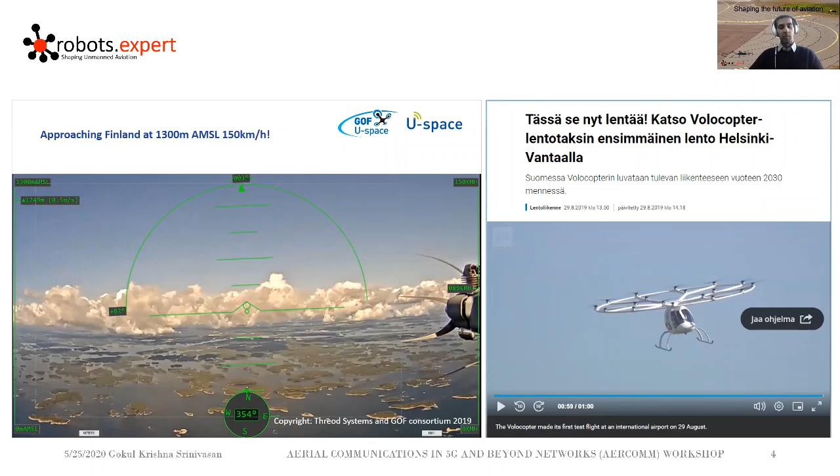And the second result of the Gulf of Finland project was the first ever air taxi flight inside an airport. So the Volocopter air taxi took the first ever flight in Helsinki-Vantaa airport. And Robots.Expert was privileged to be a part of this project, and we facilitated these trials and helped the companies with flight permissions and licenses and certifications.

Outside of these 2 European projects, Robots.Expert is also actively involved with NASA in the Advanced Air Mobility project, and we are part of the technical working groups, advising them on issues related to crashworthiness, airworthiness, noise, and such topics.

And then we're also actively involved with the African Drone Forum, where we are actually advising the unmanned aerial vehicles group for payload delivery. So these are long distance drone delivery missions, and we are really privileged to be a part of these 2 forums.

Coming to the topic, urban air mobility, the first use case we will discuss is BVLOS operations, which is beyond visual line of sight. Beyond visual line of sight could mean that the drone could fly anywhere outside of the visual line of sight, which means that you don't have a visual perception of the drone anymore. You have to rely completely on the instruments and the data coming from the drone.

As we can imagine, beyond visual line of sight is not fully accepted yet. There are a lot of regulations in place. The companies doing beyond visual line of sight would have to go through certifications and permissions from EASA and FAA and those kinds of regulatory authorities.

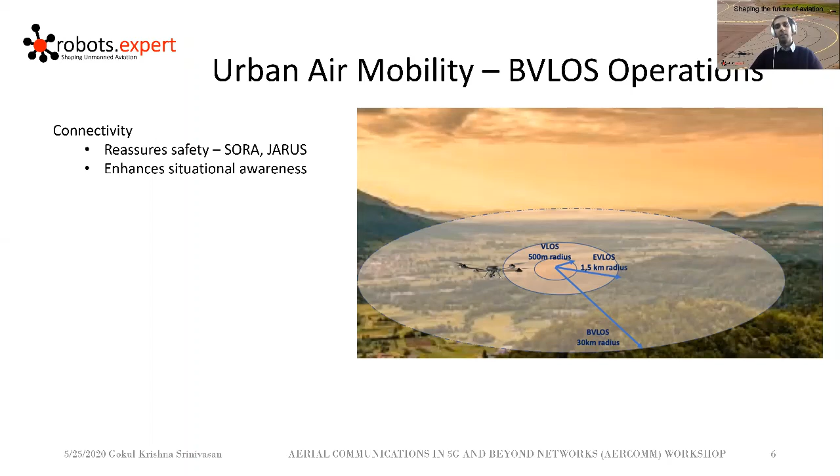And we need connectivity to perform BVLOS missions. Connectivity enhances the situational awareness, and connectivity in a way also guarantees that the drone is going to be safe. So if we have connection with the drone and the connection is stable, we can control the drone in some way or the other.

Now, speaking of connectivity and connection to the drone, the next immediate topic that I want to discuss is data transmission. There cannot be any delay in data transmission or latency. So hence, we rely on ultra reliable low latency communication.

And finally, unmanned traffic management, which is UTM, and command and control centers, which is the ground control station. This is critical in order to be able to track the drone or the aircraft and ensure the safety of the airspace.

You don't want a situation where your drone is performing a BVLOS mission and you lost connectivity, and the traffic management is not able to see or track the aircraft anymore, and you have no control over the aircraft anymore. That's quite a dangerous situation. And all of that goes back to SORA and JARUS and those safety measures. So what are we doing to ensure connectivity? What are we doing to make sure that there is no delay in data transmission?

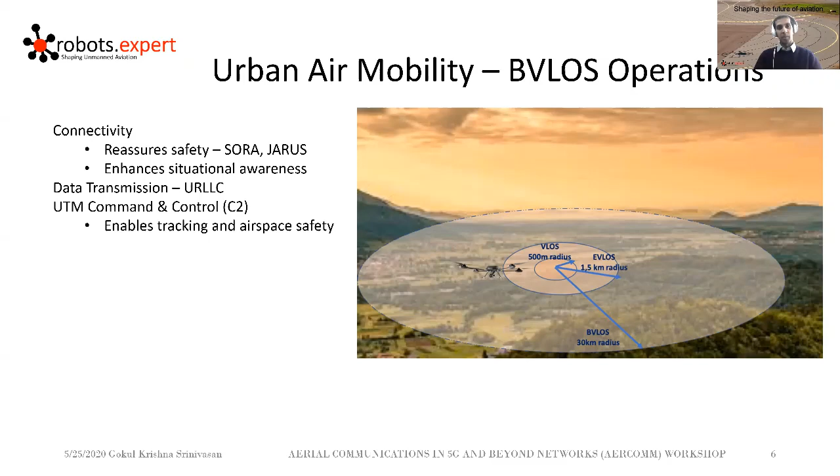Now, if we think about all of these things, in a way, performing BVLOS missions and taking all of these into consideration is almost the same as juggling while riding a unicycle while you're completely blindfolded. And it's not very different, right? So that's where the 5G technology comes into picture.

With 5G, you're able to have guaranteed connectivity, and you can have dedicated slices for missions. So every time you perform a BVLOS mission, you can actually dedicate a slice from the network to make sure that this drone has connectivity throughout the mission. And then comes low latency data transmission.

And this is really critical, because if you have an aircraft flying at 20 meters per second, and if you have 0.3 seconds or 300 milliseconds latency, that drone could have actually traveled quite some distance before you actually know it traveled that much distance. So minimizing the latency as much as possible is really critical. And finally, all of these things will lead to enhanced real-time or near real-time tracking for UTM and command and control purposes.

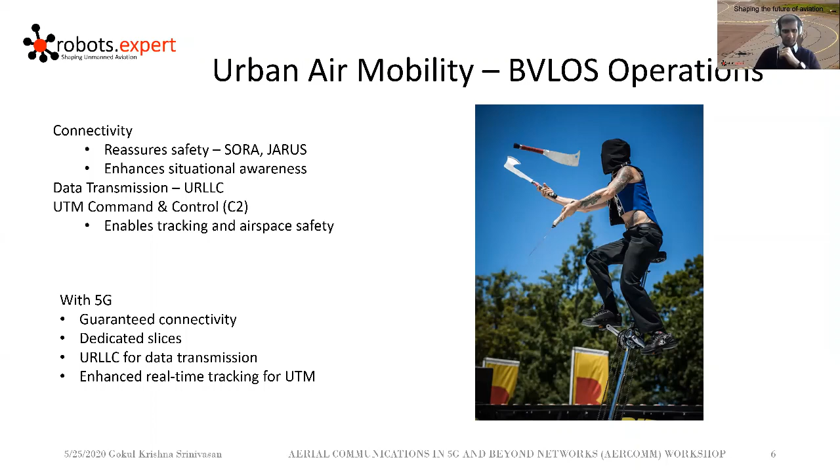In the 5G drones project, they are looking at this use case for BVLOS operations, and we have several verticals that we are trying to do, and all of them come under the BVLOS category. And in this case, we have the drones that are connected to the 5G network, and the drones all have the INVOLI tracking system, which is almost similar to ADS-B or a GPS, if we can say.

And that data is reported to the UTM system, and the UTM system is in a way connected to the 5G trial engine, which is also connected to the command and control or the ground control station, which is controlled by the pilot, right? And the pilot has a direct C2 link or command and control link to the aircraft, and the aircraft can send and receive messages through the link.

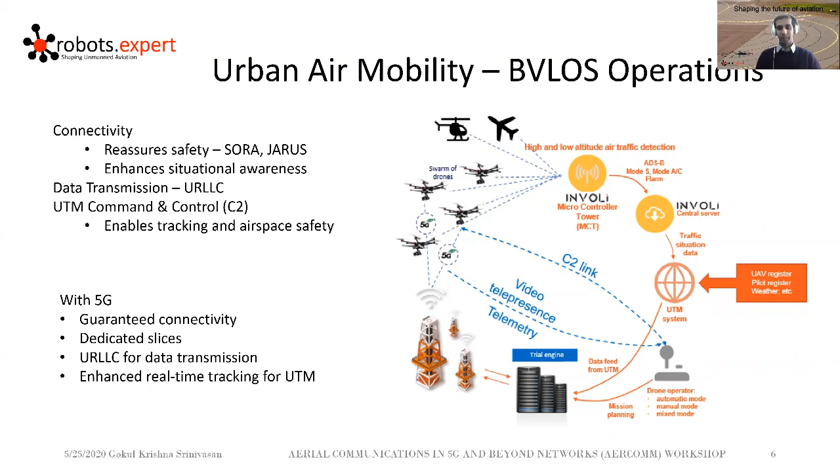And then we also have a video telepresence, or FPV, first person view, live feed of the video from the drone to the pilot's computer. And also the telemetry. With all of these data coming in, we can ensure that the operation is fairly safe. The next topic I would like to discuss is multipath error.

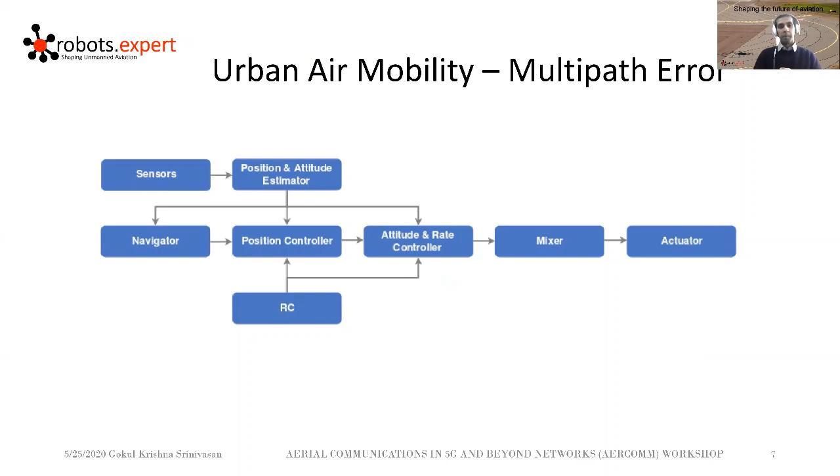Before we go into multipath error, I want to give a broad outlook or a high-level architecture of what a flight controller is made of. This is kind of what a flight controller would look like. You have multiple pieces connected together. It's an embedded system. And the highlighted area here is on board the drone. It's not something that the user can directly interact with. They have to be connected with the drone, right?

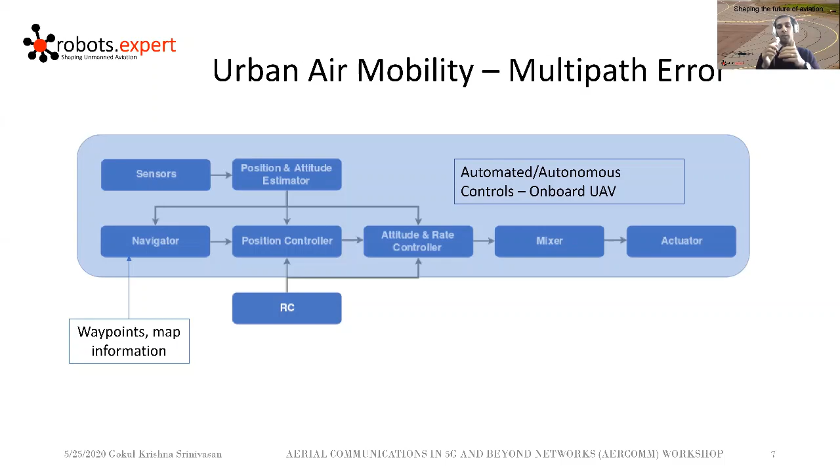And the navigator is a system that has the waypoint information in terms of GPS coordinates and map information related to flight path and vectors and everything. And the RC is the one that provides the human input, and it goes directly to the position controller, and the position controller can receive inputs from the human being saying roll left or pitch forward or something like that. And that information is sent to the attitude and rate controller, and so on.

Now, the key part here is the sensors. The sensors can be a GPS on board the drone. It can be a video camera. It can be your LiDAR for situational awareness, anything.

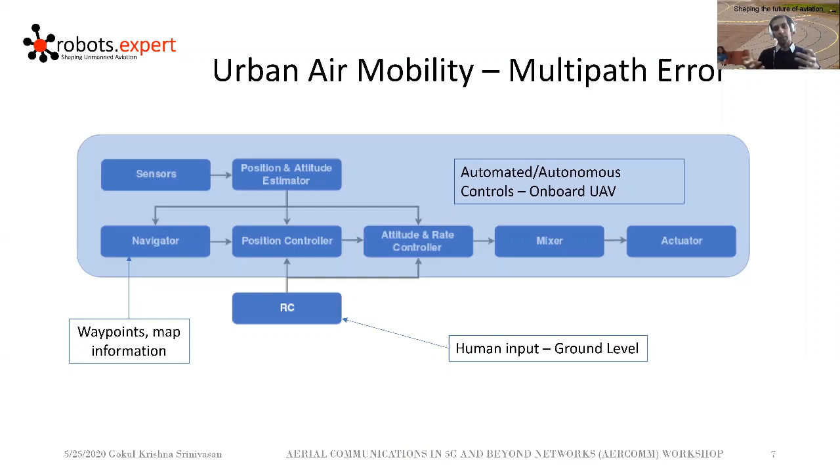In this case, we want to consider the GPS receivers, which provide values to the position and attitude estimator, which has algorithms like extended Kalman filter and several other sensor fusion methods, which combine the IMU of the aircraft with the data from the sensors and try to understand where it is currently. Now that's where we go into multipath error.

When you have signals from satellites reflected off of building structures like glass windows or design and decorations on buildings, and the reflected beams fall on the sensor or the GPS receiver, it can directly impact the triangulation that's being done as a part of the position estimator. What that means is that if this multipath error continues to happen, the sensor would not know the true position of where the signal is coming from and where the drone is actually currently located.

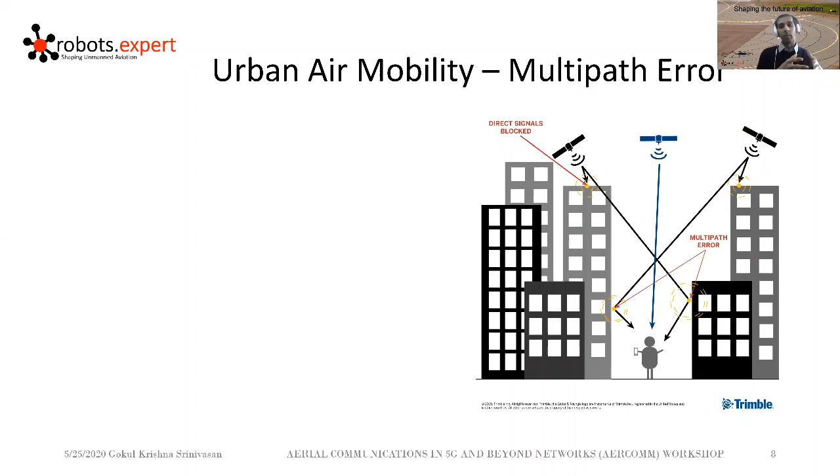Now, what this would look like is if we were to take the city of Brussels, which has a lot of tall buildings with glass structures and windows and other things, and also in the bottom right corner of the screen, you can see this pyramid-shaped glass structure, which is a source for multipath error.

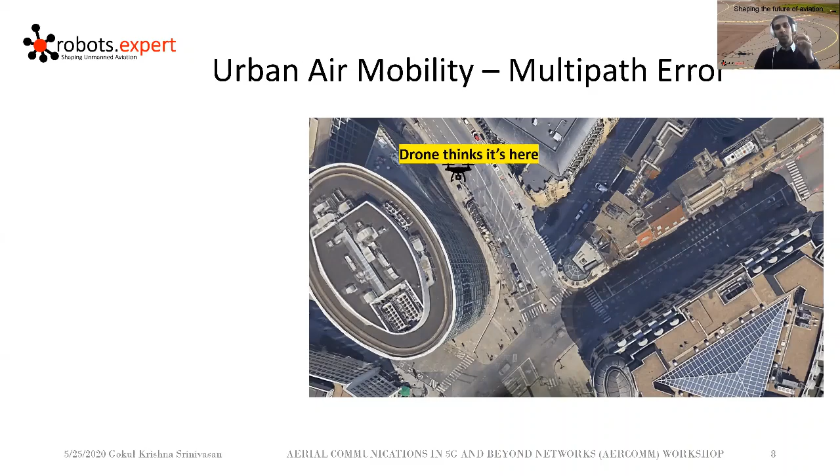In this case, what would happen is the drone would think that it's in this location, and the calculations would show that the drone is in another location, as shown in the picture. And this is what the user would see on the map. But ultimately, the drone is somewhere else. This is a real problem in terms of situational awareness and controlling the aircraft.

If you are doing a visual line of sight flight, this is not a huge problem because you can directly see the drone and take control of it and make sure that you don't fly into buildings or you don't fly into cars or anything. But when you're performing beyond visual line of sight operations, this is extremely dangerous. And this is more prominent in urban settings.

And the multipath error does not come only from buildings, glass structures, or windows or such things. It also comes from reflection from the top of vehicles. So if you have a lot of vehicles on the street, you could have satellite signals bouncing off of those vehicles and going to the drone, which is maybe flying at 15 meters. And that would affect the position, navigation, and timing of the vehicle or the aircraft.

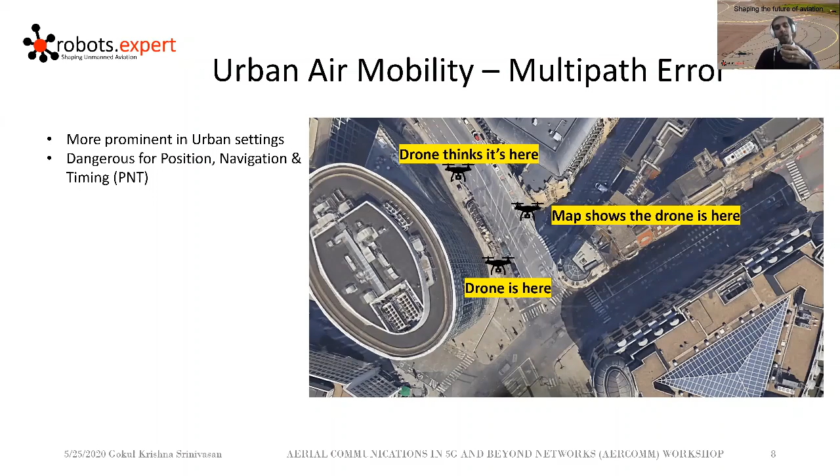And this affects both the horizontal and vertical accuracy in terms of calculating where the aircraft is currently and where it's heading to. And of course, the impact of all of these things is that the situational awareness is kind of grayed out. You really don't know what's happening with the aircraft, and you're not sure what to do next. Ultimately, this would deem the operation unsafe and infeasible.

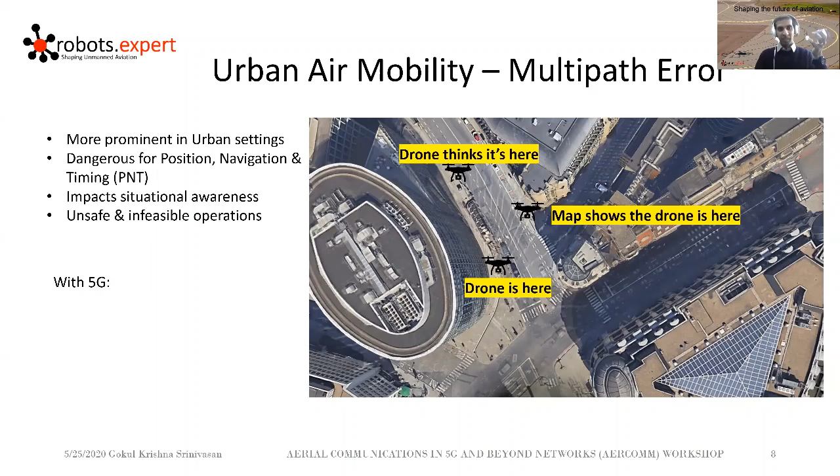Now, with 5G, we can have edge computing and cloud computing. So you can have MEC devices on board the aircraft, which would enhance the situational awareness by providing near real-time computing, so that you can have a camera on board and you can have not GPS sensors, but mobile trackers like the one from Involi we saw in the previous use case, which would directly connect with the UTM systems or even the user's map and give you an accurate estimate of where the aircraft is currently located. And it enables more optimized and accurate tracking of the aircraft.

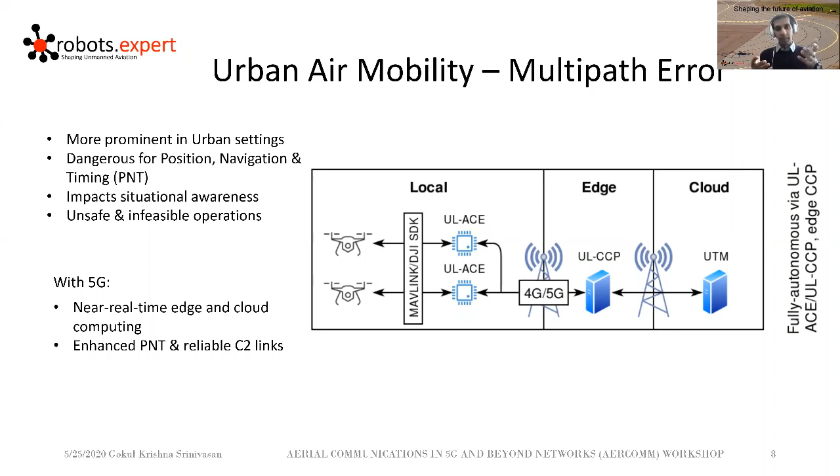Like I mentioned, position, navigation, and timing, in short PNT, and reliable C2 link, which is command and control link, is critical. And we see that 5G technology is going to enhance these capabilities by providing dedicated slices and guaranteed ultra reliable low latency links to ensure that you can do edge computing and cloud computing in near real time, and then make sure that you know where the aircraft is and you know what's happening around the aircraft.

There are a few other use cases related to UAM and 5G drone project using the 5G technology. Due to time constraints, I'm not going to go into details of these use cases. I'm just going to quickly go over them. We are considering use cases for first responders, where firefighters can use drones deployed on the 5G network to enhance situational awareness.

For example, there's a building that's on fire, and the firefighters would have to use drones, and they would have to send the drones inside the building. So you could have a private 5G network that's dedicated for the fire department in that location, so that they don't have to share the bandwidth with other users, and they can have near real-time data transmission to accurately show them what the situation is.

Another use case is the police and law enforcement officials can use drones and 5G technology for surveillance and crowd monitoring. This is something that's becoming more and more common, but the use of 5G will definitely leverage the capabilities.

As we've seen in the last few months, drones have been used in pandemic situations like COVID-19. And also, we are evaluating the use cases where drones could be used in heavily crowded environments like stadiums and malls and fairs to enable more enhanced data transmission that can be shared by many people, like a crowd.